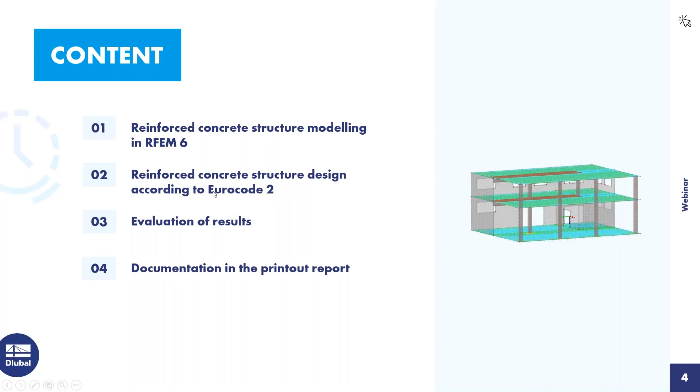This is reinforced concrete structure design according to the Eurocode. I will also design a T-section here under the slab. Then I will evaluate the results and discuss them. I'll show how we can work with the graphical display of the results, and also how we can print the results into the protocol in the printout report, and document our calculation. I will now go directly into the structure in RFEM.

The structure, with its members and slabs, was already defined. I'll only give you a short overview about the objects used - the basics of reinforced concrete design, and also the design of members, the reinforcement, definition of members, and the design using member representatives.

If you have more similar members, this was shown in the first webinar for reinforced concrete structures, which was made or shown in November of last year. There, the basic steps are shown - how you can define the properties and settings. My colleague Caroline will post the link into the chat where you can find this webinar. It's very good for beginners. So therefore, today I will go into the design, especially things that were not shown in the first webinar.

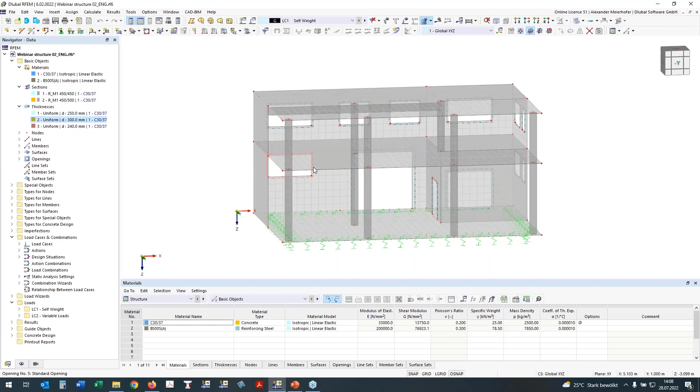The building now has elastic springs, so elastic support, and this will have also influence later in the settings for the deflection design, which I will show you.

At first, I want to deal with such nodes where we have the connection between the columns to the slab, and here we should place mesh refinements to have a better FE mesh.

For this, I go to the data navigator, where by double click I can open a new nodal mesh refinement, and give my settings, which I have for radius 1 meter, and the inner target FE length is 15 centimeters. It comes from the dimension of the cross section of the columns.

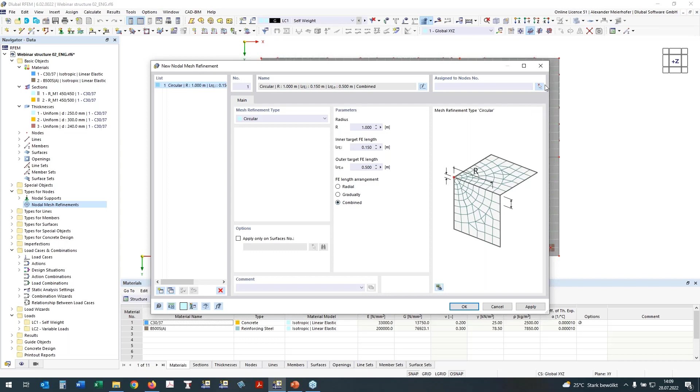For the length arrangement, I use the combined approach, and now I will assign the nodes with two rectangles where I want to have the refinement. If we take it through in the isometric view, we will see I have it catched, and everywhere was now my mesh refinement.

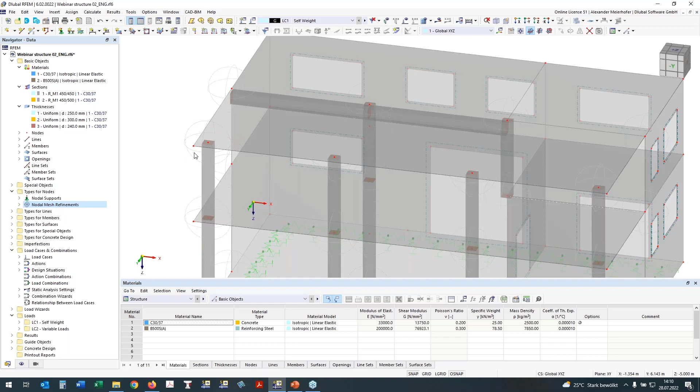On these nodes from the column and the slab, we have also singularities, and how we can deal in the concrete design with these singularities is described in a very good knowledge base article on our website, which I want to advise you. Caroline will also send the link to this technical article in our chat, so you can find it very easily.

And I will continue and select one approach, which is the use of the surface result adjustment. It means I will select or define the area which is exactly the width of the column, and set there the inner forces of the surface to 0.

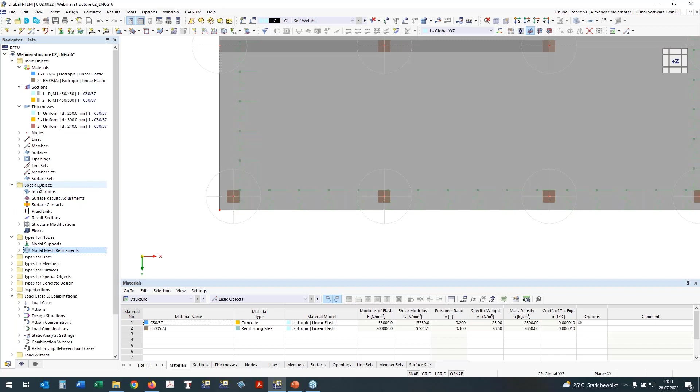Surface result adjustment can be found on the special object. By double click, I can open the dialog, and now we can define a new rectangle result adjustment with the dimension of our columns.

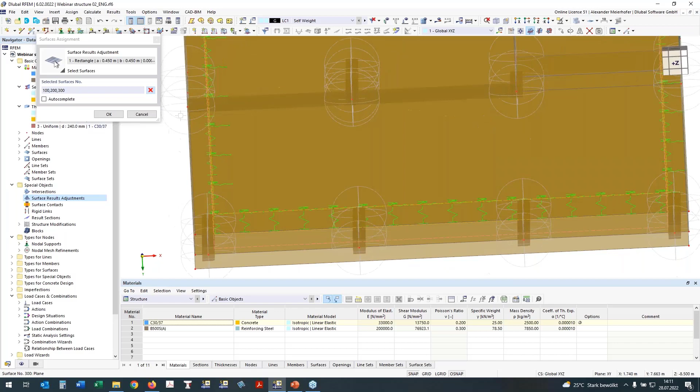I want to have it on all 3 surfaces, and you see the number of my surfaces was so chosen that I know where it is placed. So 100 is the slab on grade, 200 the slab over the ground floor, and 300 is the slab over the first floor. If I press OK, I have already assigned the surfaces, and now I have to define the center of my adjustment.

Here, by copy, I can simply copy this adjustment and set only the new center of the result adjustments, and then I will have it in all areas.

I make one new and want to define it also over the wall. The width is 25 centimeters, and I defined a little bit bigger area, and defined it here because here is a wall. Define it also in this area.

I made one failure. Now I forgot to define the adjustment type. I want to set it to 0, and I want to set all inner forces to 0, and this should be done for all defined adjustments. So I was one step too fast before.

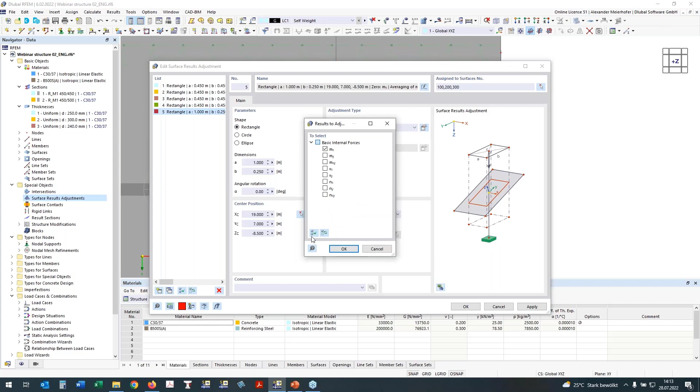This should be done before I copy it, and then it is always in the right setting. By OK, it will be placed. We can see it, and we can also work here by drag and drop. We copy it by drag and drop. If we press the Control key, you can put it by drag and drop, and it's very simple to work with it.

So this is then for the connection of the columns to the slab. One additional setting for the slab is necessary. I want to have here hinges over the length of the supported line.

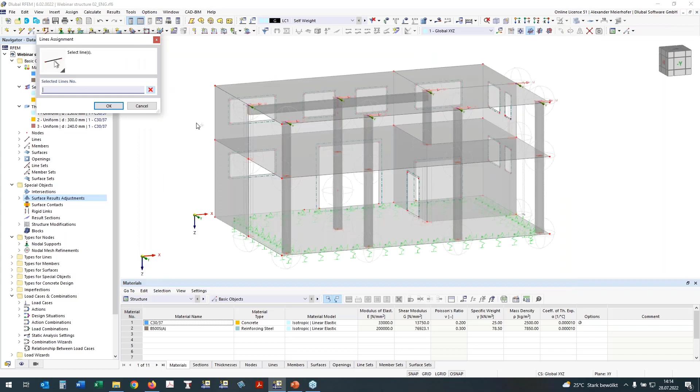The definition is very simple. We make double click on the surfaces, and the edit surface dialog will open. Activate hinges, and in hinges I click to select lines, press Control, and then I have selected 3 lines where I want to have hinges. The hinge type is as default already the moment hinge, and I will put it to all lines, the line hinges number 1.

Okay, done. It's ready now, and if we take a look at our refinement, it is everywhere placed, and also the adjustment. In the display navigator, we can deactivate the mesh refinements because I don't need it anymore for the work now, and the graphic is then more clear for the presentation.

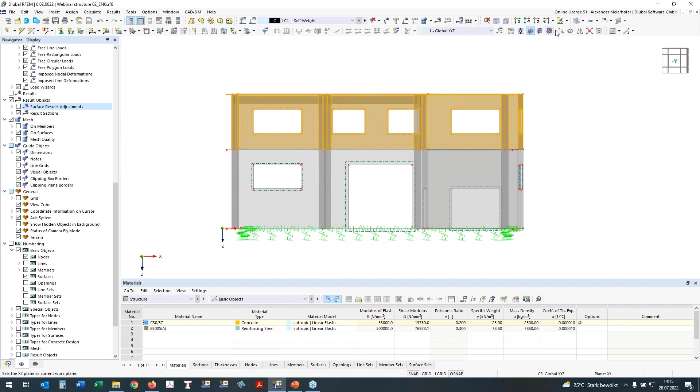As next step, I will define the RIP for the slab over the ground. For this, I will hide the first floor by selection, and now I have the first floor.

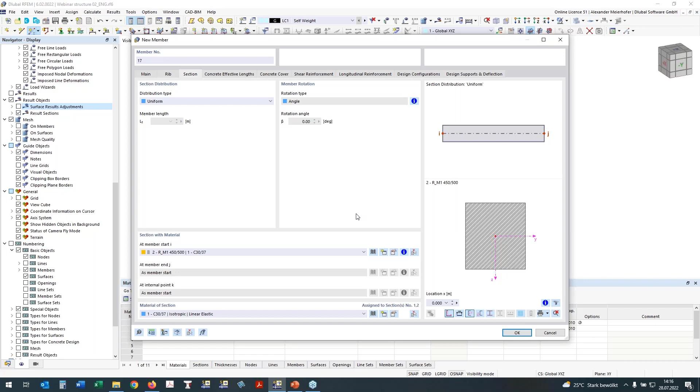By using new member, I can define now section rib by selection of the section number 2, which should be used for the web. The web should be 500 millimeter high. I can define now the rib from here to here, and also from here to here.

Something was wrong, okay, I do it again. I know what was the topic, I will make the selection new and select only the slab which I want to show. So the new member is the same section, section number 2, and then from here to here.

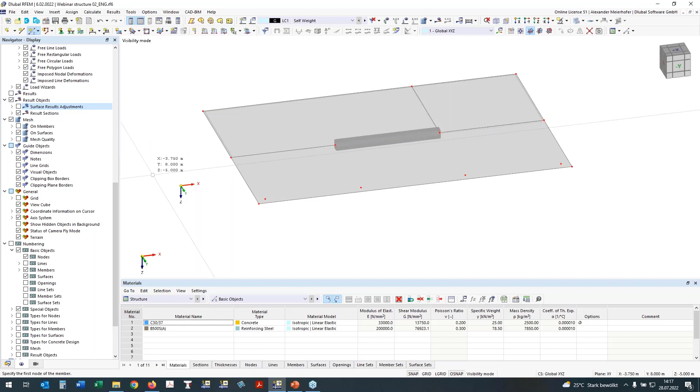By escape, I come to another point. So if we take a look at the complete view, we see here in the first part I took care about the rib. I go now in the rib section, and this is a very new feature that we can now also define more sections or segments during one length of the members. This is completely new developed.

I use here the calculation of the width, integration width according to Eurocode 2, and the splitting of the segments can be done in 50%, 85% and also 100%. Now we have more different integration points. Here we have an inner support, and it means we have to consider also for the calculation of the integration width the length of the neighbored span length. So I have to define here 180, and I have now my different integration width.

We have here also a new option that we can make a linear distribution from the integration width, and now we have defined the rib for the design.

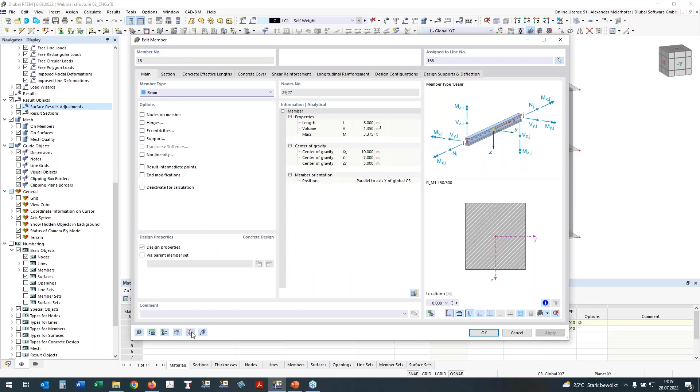For the second member, I use here the copy of object selections. It's a very nice tool. If I click here, we have really copied all inputs, it's a rib, and the only thing I have to change is that the end field is related to the segment, for the user-defined point 80. And then the inputs for the static analysis is ready.

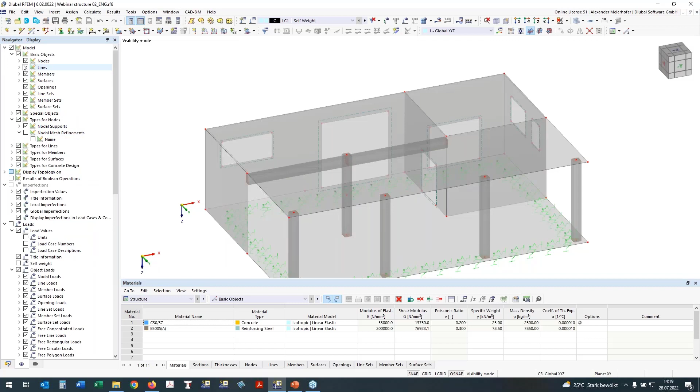And now I do it again what I did before. And a very nice feature from RFEM 6 is now that we can show the rib section also in the graphic, and we see that the integration width is also shown here in our main graphic of RFEM.

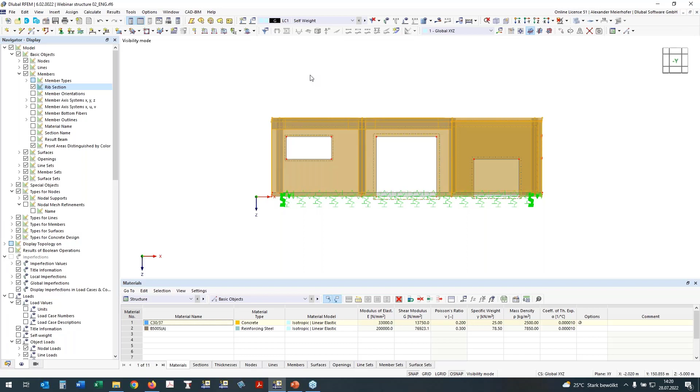Okay, now I will select again my slab here, and will continue with the definition of the design properties.

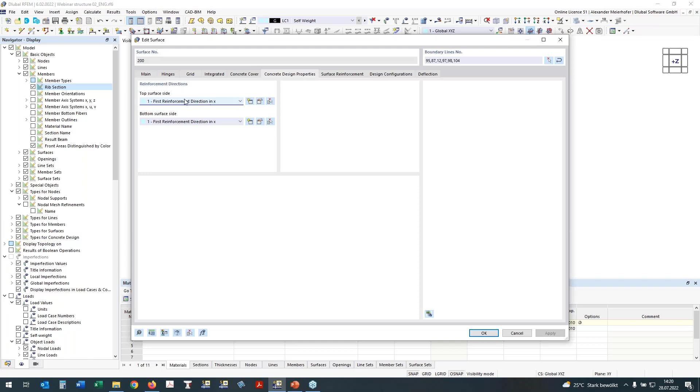The design properties for the reinforced concrete calculation are activated by double click. I come into the surface dialog, and I continue with the concrete cover. The concrete exposure durability is defined by the exposure class, which is default to XC1. This is what I let, it's okay. The design direction of the reinforcement is the first direction goes in X. This is also default, which I will not change.

And here is one important topic. In the surface, I need a surface reinforcement for the diameters so that I will know the statical depth for the calculation. I just design a type of basic reinforcement, which will be in both directions, diameter 10 with a distance also 10 centimeters, and by pressing OK it will be then assigned to the surface.

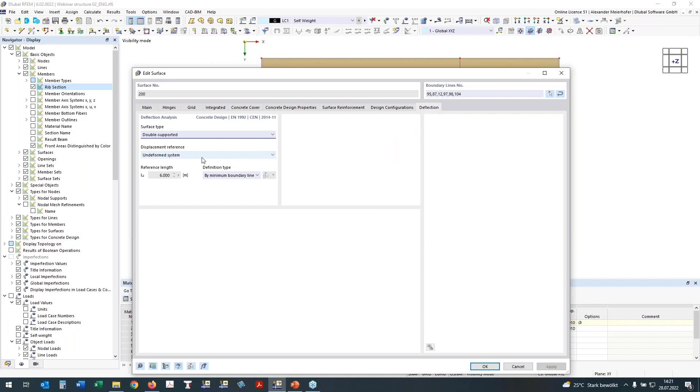Here are listed design configuration, which I don't discuss today, this was in the first webinar very detailed. I will later take a look at the serviceability configuration, but here's one very important thing which I mentioned before at the beginning.

We have an elastic supported structure, therefore it is an advantage to relate the deflection also to a deformed slab or plane. Here I use the parallel moved slab as a reference plane for the deformation, and as reference length I will define it manually by 2 points and say my reference length for the maximum allowed deflection is from here to here. It's about 5.5 meters. By OK, I have defined all properties for the reinforcement design.

We can also take a look into the graphic. If we go to the types of concrete, we see here we have surface reinforcement longitudinal, and if we activate it, we see that the reinforcement is defined in this area.

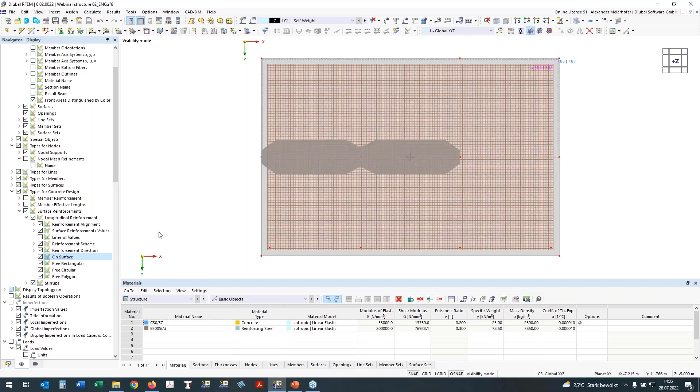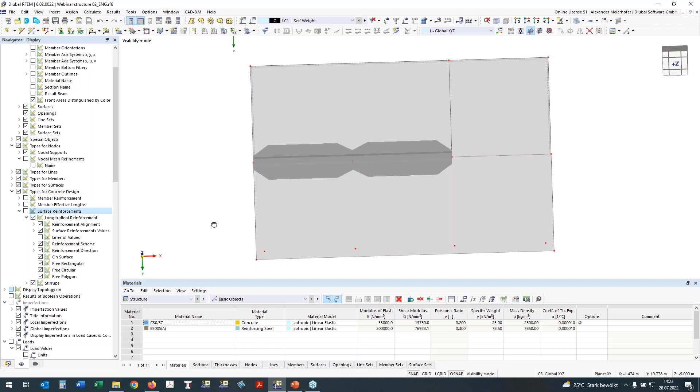I will go now to the definition of the ribs. Here we need also reinforcement. I want to design not two members; I want to design it with a set of members. So therefore, I select both by pressing the Control key, and create a new set of members.

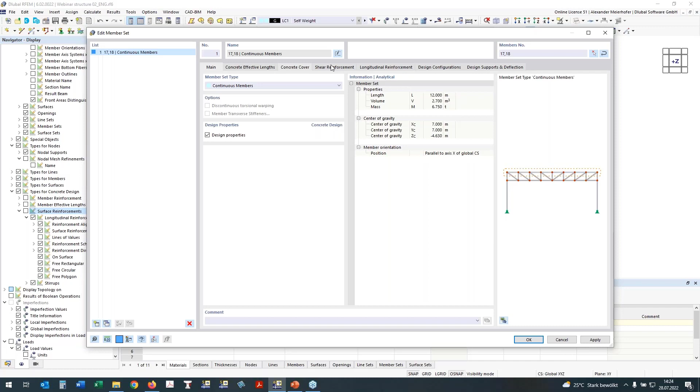And here we have now the new set of members, and I can say now design properties for this set of members, and we see that all inputs for the design properties are now open. It means the concrete cover is now shown, and here we have also the same durability which we have already used for the slab, XC1, and the shear reinforcement.

I will change the distance to 50 centimeters, and if we take a look in another view, then we see here the variable cross section of the rib is already shown, and also the reinforcement. I will go to the longitudinal reinforcement. We see here the reinforcement which we have defined in the slab is already placed. If we go closer, we will see it.

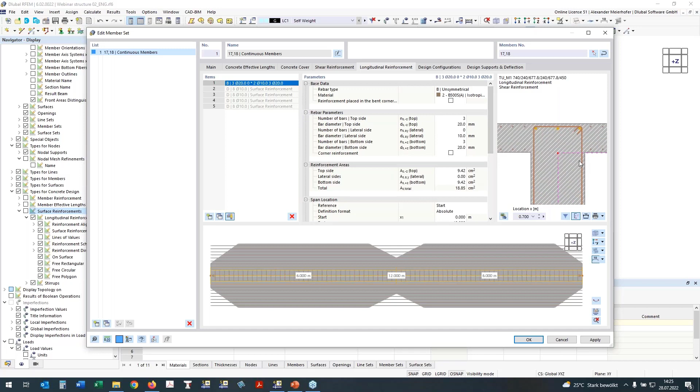It is activated by this icon. If somebody doesn't want it, you can deactivate it or leave it. I want it, so therefore I will leave it here. But I will define now a different distribution of the longitudinal reinforcement. I want to have it unsymmetrical here in the web.

So therefore on the top side I will define here these three rebars with diameter 20, and a lateral reinforcement of 2 diameter 10. And on the bottom side, I want to have 3 diameter 20. And it will be directly updated here in the graphic.

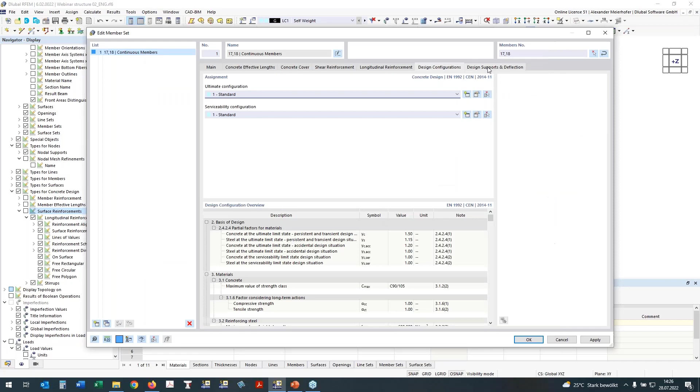Here is also the 3D graphic of the reinforcement, which can be used for control of the inputs. Here we see a small reinforcement drawing, also the used shear reinforcement, which can be activated or deactivated. It's nice for control and for printing. Okay, I can close it. Design configuration is the same as for surfaces in all parts.

And now there is one important tab. We have to define now the deflection properties or conditions. I want to check only the deflection in Z direction for the gravity loads, of course. And here is the point: my reference is the deformed segment ends. This is now also the point which I mentioned.

We have an elastically supported structure. So it means the supported ends will be a little bit displaced in Z, and this I don't want to have in the design check for the deflection. Important is that I generate on the ends or in the middle some design supports. We have here design supports in Z direction, and our wall is 250 millimeters. It's a monolithic connection, and will be used for the walls at the end and the start.

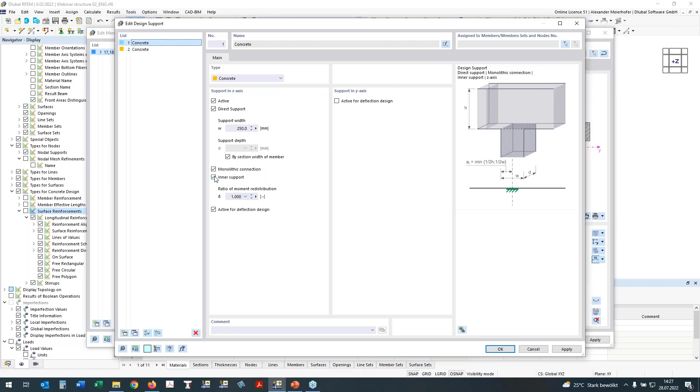I directly copy it and use here also the width for the columns, which are inner supports, and here I have to deactivate inner supports and press OK, and then it will be placed directly at the beginning. I will change the view here to see it. Here we have the first one, and at the end it will also be placed,

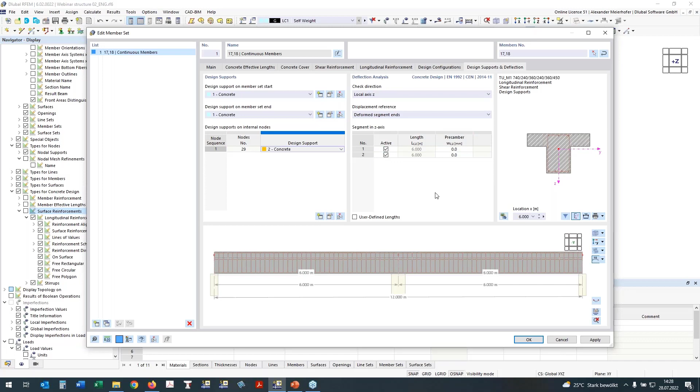with the 250 millimeters width, and in the center I will also use the design support, but it is now for the column and it's bigger, 450 millimeters. And we see here now for deflection we have some lengths, 6 meters and 6 meters, and if we had some pre-camber we could define it here, but in this case I don't have it.

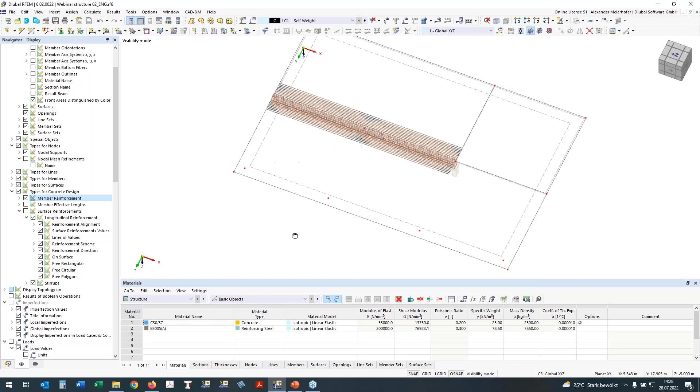But okay, we can now confirm the inputs, and also we can check the member reinforcement and display it, and see that everything is okay. Before I start with the calculation, I will make new object selections. I have to make it a little bit bigger. Create new object selection, and the advantage of this object selection you will see immediately after closing the dialog.

This is my slab over ground floor, and I press OK. And now we have here in the guide objects the object selections, and you see I have already done a little bit more, but the new one is object selection number 200.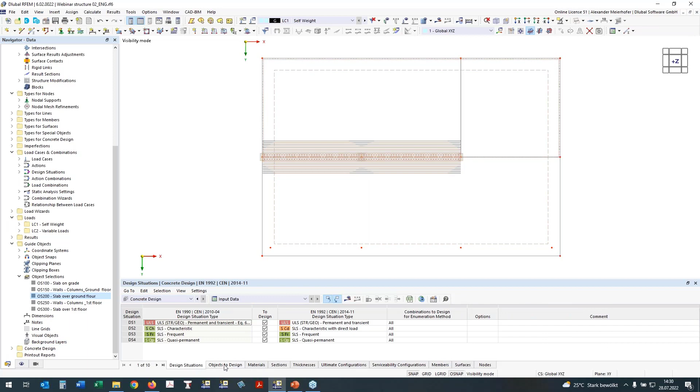And if I go now to the concrete add-on, I can use the object selections directly to define all objects which are there in the add-on. It is then replaced, and it will only show that object, and it is very good to organize the work.

Before I start the concrete design, one hint about what you have to check in the basic settings. You have to activate the concrete add-on in the design add-ons, and in the standards you have to define the used standard for reinforced concrete design. Here I will use the Eurocode 2 with the original rules, so without national annexes.

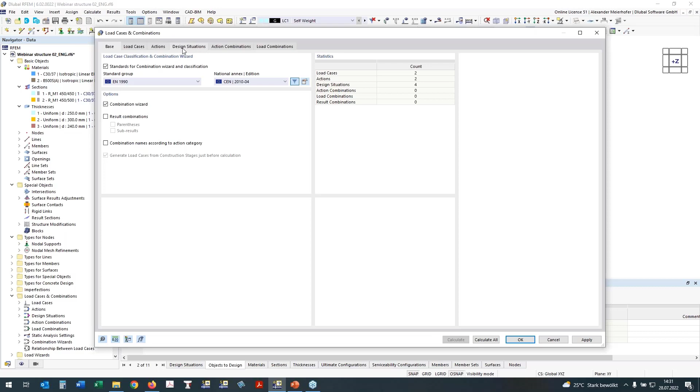And if we have the loads, this is also one additional hint. I have defined a load case, self-weight and variable loads. We have to define the action category there. It's for the office. And in the base data, I have the standard group and the combination wizard defined. In the design situation the serviceability and the ultimate limit state design situations will be listed automatically. And here will be the list of all activated design add-ons.

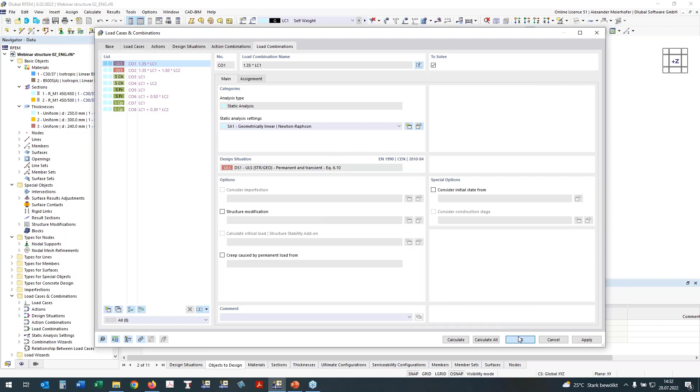Here we work only for the concrete design, so I activated it for the concrete design, and all load cases related to this design situation will be calculated. I can multi-select it, and I have to select my combination wizard. The combination wizard is defined so that we generate load combinations, and the static analysis should be done by first order and geometrically linear. If we go to the load combination register, these combinations were generated automatically and will also be used in the design of the reinforcement.

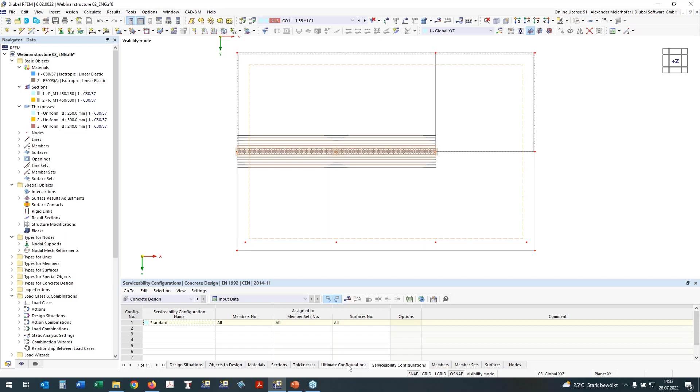Now I go back to the concrete add-on. We have here already designed the object selections. Material and sections are only listed for control. Here are the settings for the ultimate limit state. Here we have the serviceability state. In the serviceability configuration we have the stress check, and the crack analysis should be done by finding automatically the limit value for the crack width, according to the defined exposure class. We have XC1, so I expect 0.4 in the calculation. For the deflection, we have L, the reference length, divided by 250. And here is the crack state detection for the serviceability.

This I want to explain a little bit more, because this is really new, released two weeks ago. The first one is the crack state calculation for each associated load, so each load case or load combination is considered and calculated for itself. Crack state determination as envelope of all SLS design situations means the program checks all load cases defined for serviceability and uses the correct state, the most safe setting. Calculate the deflection only in cracked state independent of the load means all elements are considered as cracked. I'll take the first setting and confirm it.

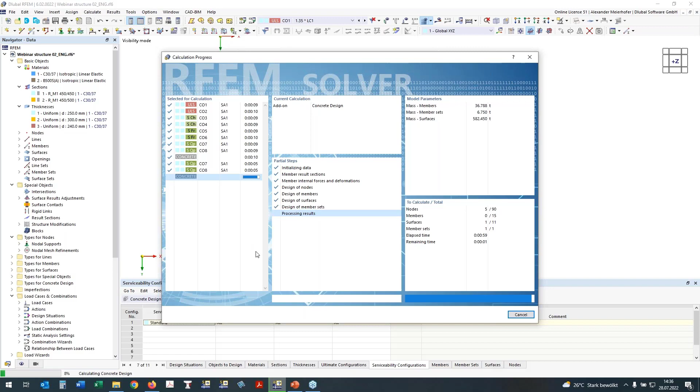Okay, so now we have an overview of what is fulfilled and what not. We have very detailed tables. The work with the tables was shown in the first webinar. Today I want to work more with the graphics and use only the settings for the member. We see the design ratios of the member here. Everything is clear. I have 2% for the detailing of the spacing, and all design rules are okay. The design ratios are also sorted by members, surfaces, and nodes. Design ratio for nodes is also new; this is the design ratio for the punching proofs, and we see here it's not fulfilled.

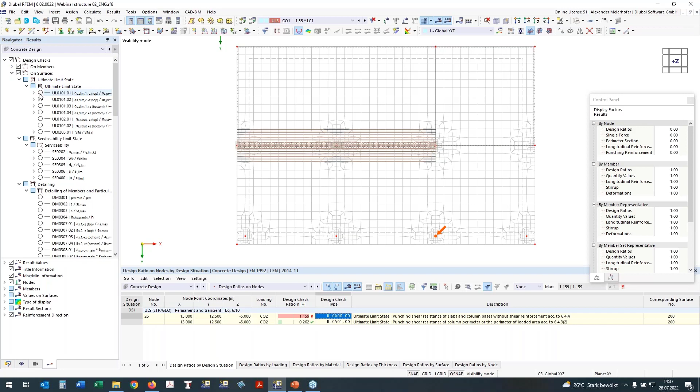I will go now to the graphical results, and firstly we take a look at the results of the surface, and we have here the result values. I want to activate it as only extreme values, and here we have the panel. So here's a ratio of the defined reinforcement, the ratio between the provided and the needed reinforcement. And here we see in the red areas too little reinforcement defined.

On the top side, here is also a punching problem. I would expect, of course, more reinforcement here for the punching design. If we take a look at the bottom reinforcement in the first direction, we have everything in the green area. The maximum ratio is also on this small part, but the main area is under 1. And the bottom reinforcement in direction 2 is also okay. We have here a ratio of 93%.

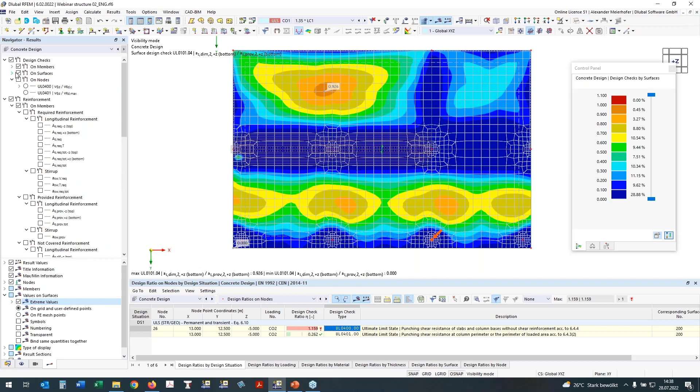And here we see for the required punching reinforcement, we need 0, but we need then longitudinal reinforcement. In the configuration, I said, please calculate the required longitudinal reinforcement to avoid shear reinforcement. And we see if we would place here these 12 or 13 centimeters, everything would be fine.

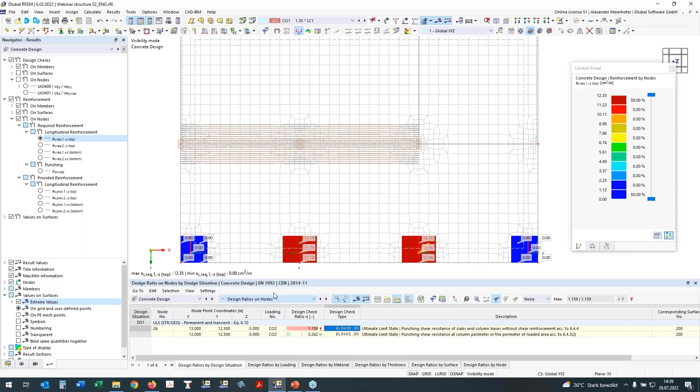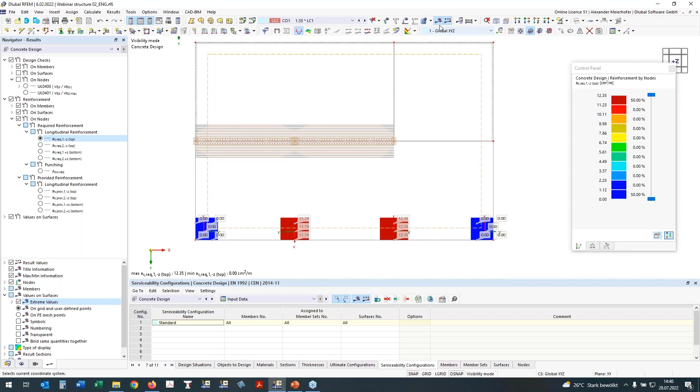I will now define the missing reinforcement. For this, I will go to the global settings of my add-on. I will deactivate the deletion of my add-on results if I change the reinforcement. And now I can work in the inputs. I deactivate also the mesh so that I have a nice view, and go now in the navigator to my types for concrete. And for types for concrete, we have the surface reinforcement.

With new surface reinforcement, I generate a new one, which is a free rectangle area. I assign it to my surface number 2, and the missing area here for punching is about 7.8, and I want to have it only in the top direction. And here is the area which I want to define. I activate my grid to have good coordinates. So I have a grid of 25 centimeters, and this area is already defined.

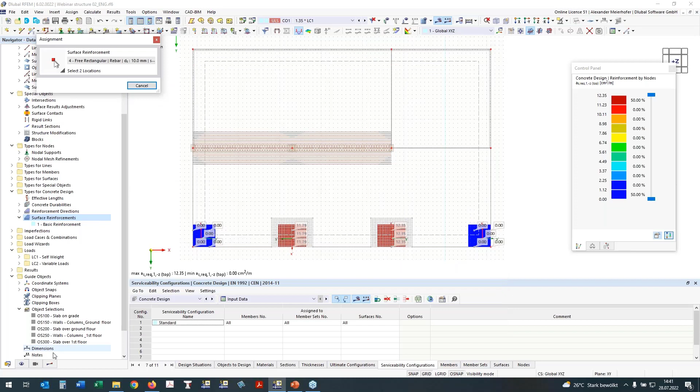I copy it like it was for the result adjustments of the surfaces, and I can use really the same concept. Now I want to do the input also on the other missing parts. For this, I copy the existing one and go in the result navigator, so we can activate our graphic for surfaces and say the surfaces have a not covered reinforcement on the top side in this direction.

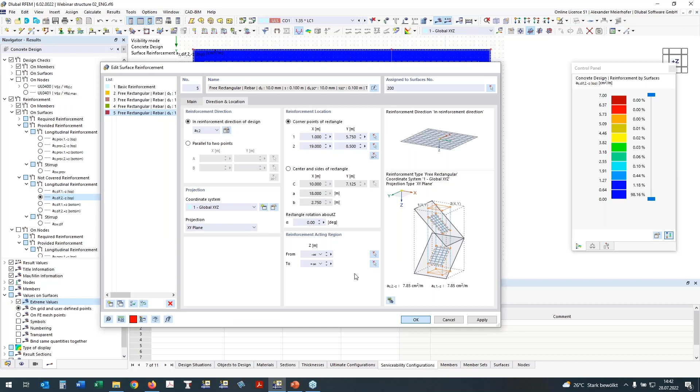And if we take a look here, I will define the same area over my supported line in the first direction, and in the second direction the same area, and take a look what is here. Here I need also some reinforcement, and take it over this length. It was a little too small, so you can also redo it, and by pressing OK, it is then confirmed, and it is in the structure.

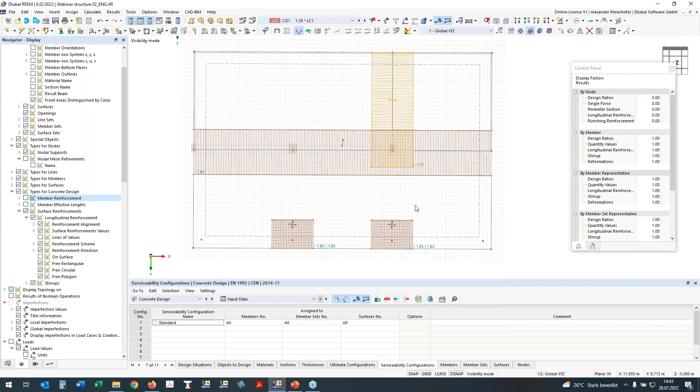For the surface, I can then take a look where my surface reinforcement is. I go to the surface reinforcement and activate it on the surface, and we see what part of reinforcement is defined, and I can also check if the direction is right. Here I have defined one thing too much; I want to have only one direction, and it's the same here. By OK, we see I have only one direction. That's how easy the definition of this additional reinforcement is.

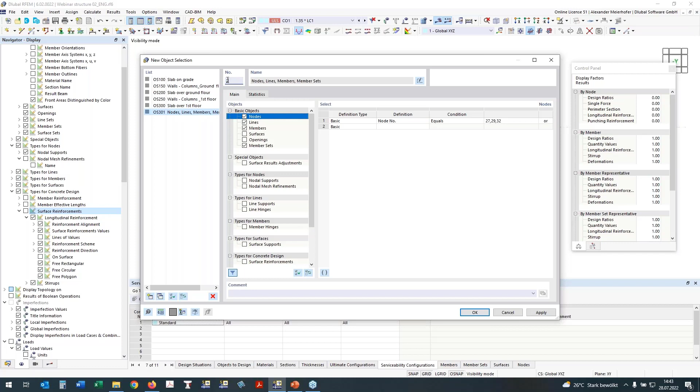Now I want to take care of the reinforcement in the rib. For this, I select it and change the view, and generate also a new object selection, whose name should be the T section. Press OK.

And here I work now with the design checks on members, and take a look at my cross-section resistance. We see I'm under 1, so everything is fine. If I take a look at the shear reinforcement, the shear proof is also fulfilled, so I need no additional inputs. The serviceability is done in such a way that the stress of the steel is checked.

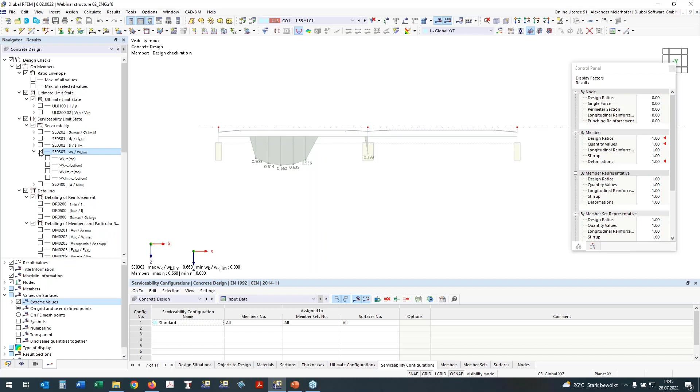We can take a look at the crack width, and the crack width is also fulfilled. And now we want to show you the newest release. We have here the additional details in the result navigator. This is available since Monday in the new version, which you can download from the extranet of RFEM 6, and you can activate here also the direct value of the crack width.

For example, we have here only 0.26, and it is also for the deflection. The ratio is very small, and the existing deflection is now 0.6, and we see here it is related. Here is the end, it goes to 0, and this comes from the relation to the deformed structure.

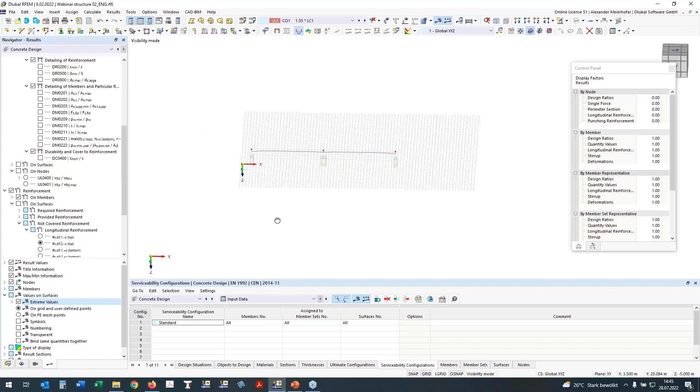Okay, if we take a look at the required reinforcement, it is also here in the table. Required reinforcement of members, As top, As bottom, and we can take a look at it. You have here the graphic, and if we want to print it to the protocol, we have to generate a new protocol, but what we have to consider is that the calculation must, of course, be done again.

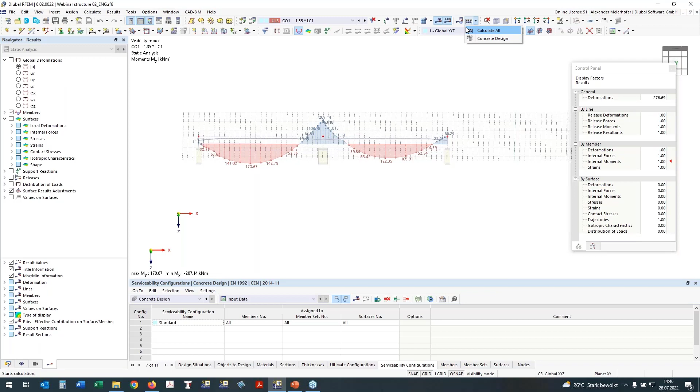We changed the reinforcement. For this, I go to the global settings, activate the deletion of the add-on results, and then it will be updated and deleted. And now I have to start the calculation of the concrete design add-on anew. You can do it also here with this icon and start only the calculation of the add-on. The static analysis results were not deleted because the reinforcement has no influence on them. Now it is only the calculation of the concrete add-on which will be refreshed and done again.

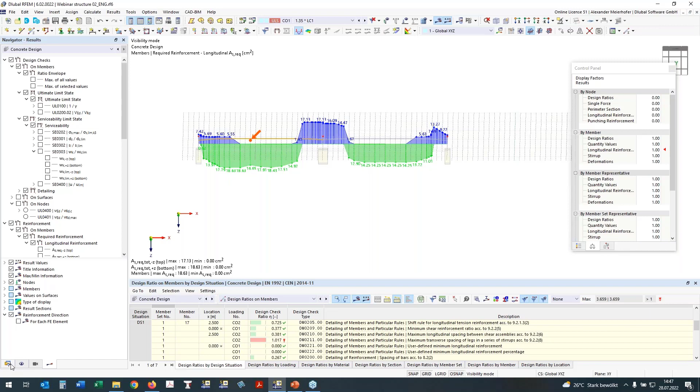And as I said before, this is a two-step calculation. And in the last step, we have here also again a concrete calculation for preparation of the results and the graphic. So now we have the updated results. Design ratio by nodes, by members is okay. And then I will go to the printout report in the navigator and show you how simple it is to work with the printout report.

If we generate a new printout report, I make it here for the concrete design and assume that all other documentation of the static analysis will be done separately in another printout report. Today I want to show only the report of the concrete results. So types for members and types for surfaces we don't need, but types for concrete design is necessary for the durabilities and the surface reinforcement.

And what I also need is the concrete design, where we have to discuss what is necessary. We see here it is possible to show every tab which is also available in the add-on. It can be printed, but I want to have here only the design ratio by set of members, for nodes and for surfaces. The reinforcement for members should also be shown only by member set, because I design only the member set. The provided reinforcement by member set, yes; the not covered reinforcement I will not show. For the reinforcement by nodes, I leave it as it is, and the design overview will be deactivated.

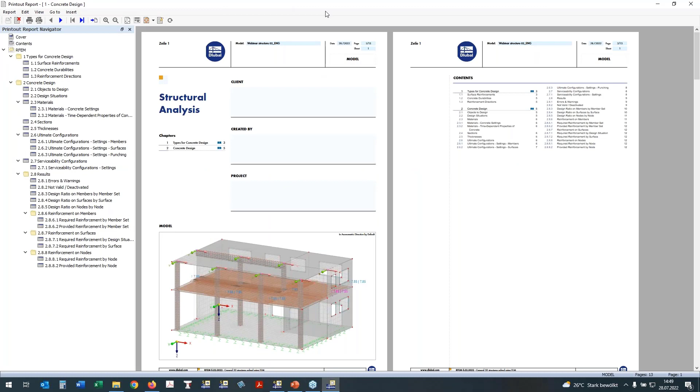By Save and Show, it will be generated. The printout report is one of our new developments in RFEM 6. It is completely new. It is a separate instance, which can be opened parallel to the RFEM calculation. And if we take a look at our results now, result members, we go through the results of sets of members.

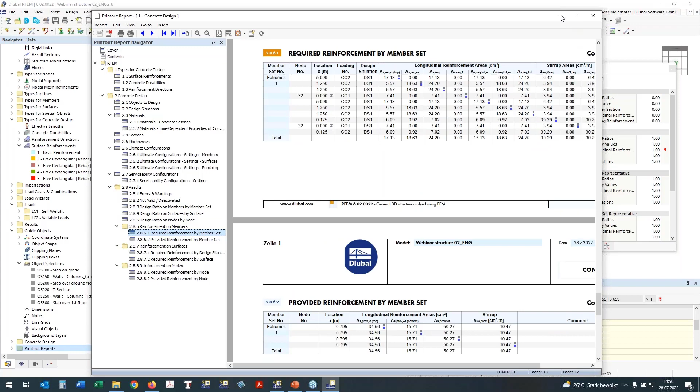Here is one thing, the crack control, which is overloaded. This we can check later. Detailing is 1.017. It's okay. So from my side, it's okay. For the design ratio of the nodes, the punching design also has all ratios fulfilled. And if we go to the required reinforcement by member sets, we see the list of the required reinforcement. Here I want to show also how we can print the required reinforcement, because in my eyes a picture or diagram is better than many tables.

Here we can use the printout report, the graphic, and I want to use the current one. New is also the possibility to define an area in RFEM to print it to the graphic.

By 2 points, I will activate the grid so we can move it and make it a little bit bigger.

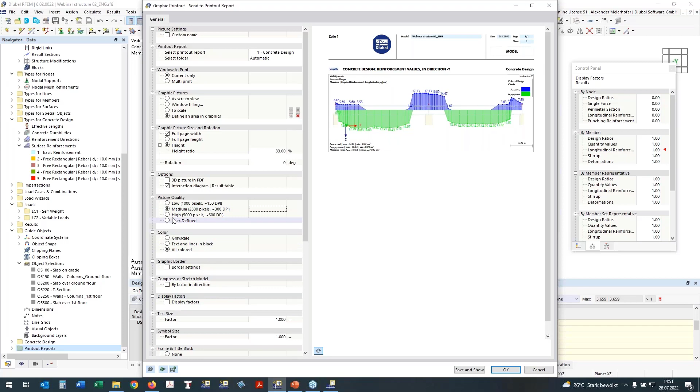Okay, and this area will be saved and used for later. I make it a little bit bigger, and the panel should be outside of the graphic. By OK, it will be printed to the protocol. If you activate it, you can see it here and make it smaller.

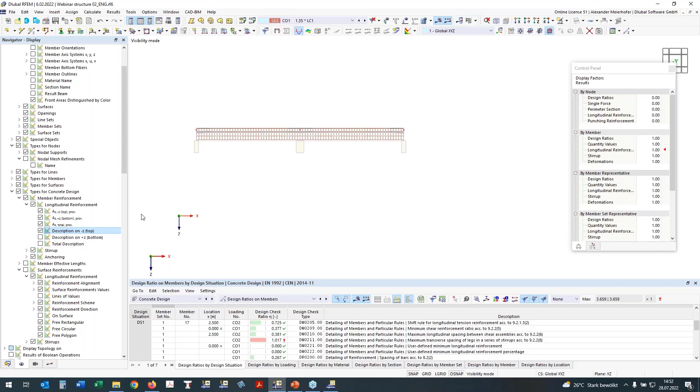Everything is here, and by using the inputs of the reinforcement, we can deactivate the design checks on the required reinforcement and activate our member reinforcement longitudinally, using the descriptions. With this description, we can print it directly into the protocol by the same functions. The same icon will be pressed, so the area is the same. I don't change anything, and with OK, it will be printed.

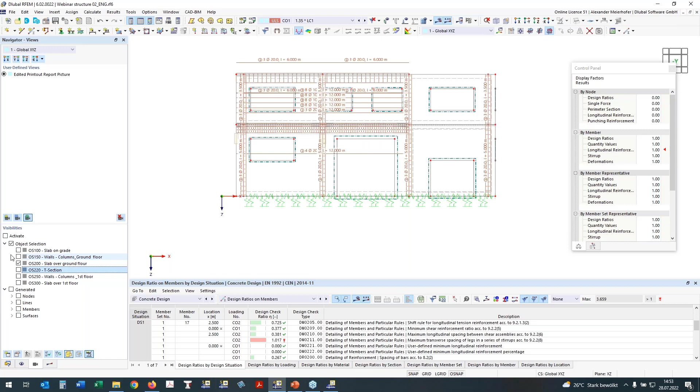Now I will take care of the slab. For this, I will go to my view navigator, display view navigator, and this is the next advantage of the object selections. If you remember, I have here the slab over the ground floor, and if we take a look at the Z direction, now everything activated is what I selected before, and I can continue with my presentation of the results for the slab.

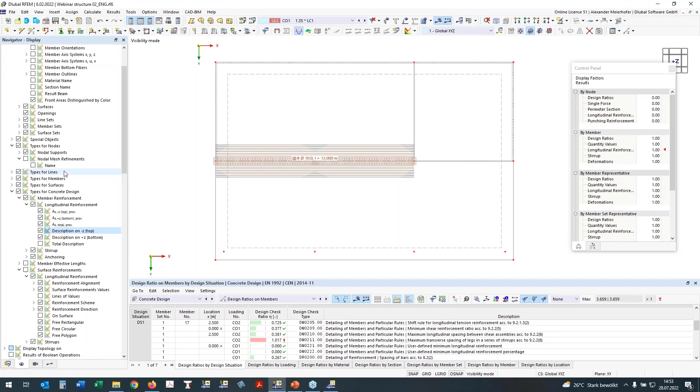Firstly, I deactivate my member reinforcement, and in the result navigator for the design checks of the surfaces, I go to the ratio of my longitudinal reinforcement on the top side. It is okay, the bottom was also okay.

We take a look at the displacement, so this is a ratio like it is for members, and here is also the deflection. Important for me now is the punching proof, because this was not fulfilled before. We see it is now under smaller one, the ratio. It's perfect, and we can print now also a documentation of our results.

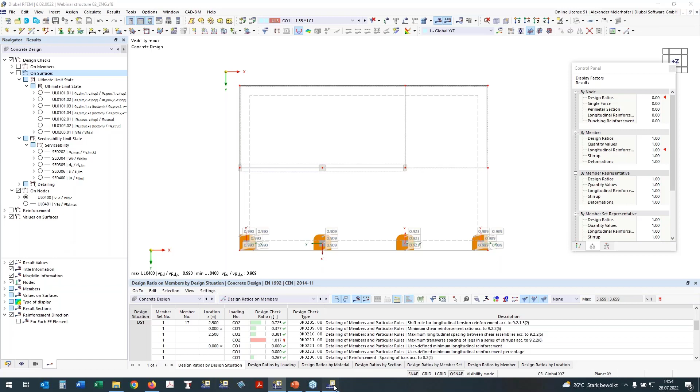I want to use now a bigger paper like it was done in the documentation. The first printout report, this is format A4. I want to use a bigger one for the plots. I'll make a new one, a new printout report, and say this is only my annex for plots. For this, I deactivate all settings here and generate a new page format.

For this, I have to select a printer which is able to print bigger pages. So here is my printer, which can print A3, but you need 7 millimeters distance on the bottom side, and I don't need some cover page. With OK, it is saved, and save and show.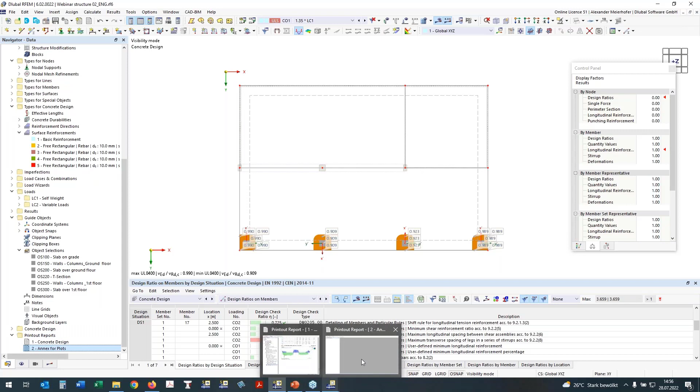I will get a new protocol, which is also shown here, but it's empty until now, because I printed no reinforcement or result there. I want to use the same one again and print here the surface. You see the last view is saved.

I want to have a new one. I want to use it in Z, define it in the new area, so from here to here, with OK. And with the multi-print, like I did before, I can go to print all result diagrams which are necessary.

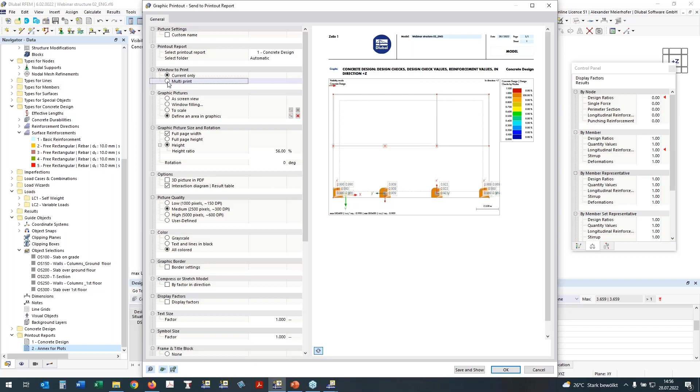Model, it's not necessary, load cases here not, and in the add-on. Now you see this navigator is really the same navigator as here in the result navigator in the main program, and we can print all results which we want.

This is a very nice graphic. On each node we see the value which was assigned in the calculation.

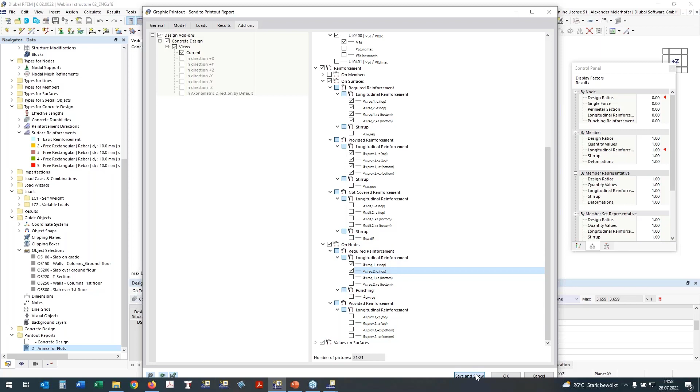Required reinforcement, of course, I want to have it shown—my required reinforcement and also my provided reinforcement. For surfaces and for nodes, I need the required reinforcement on the top side, which must be placed for avoiding the punching reinforcement and to fulfill the punching proof without shear reinforcement now.

It is now started to generate. I have selected, of course, many graphics. It is started now to generate it here in RFEM, and then we will see it step by step here in our printout report.

Oh, this was my failure in the presentation. I selected the wrong one, so let us take a look here. The principle was the same. Let us discuss the result.

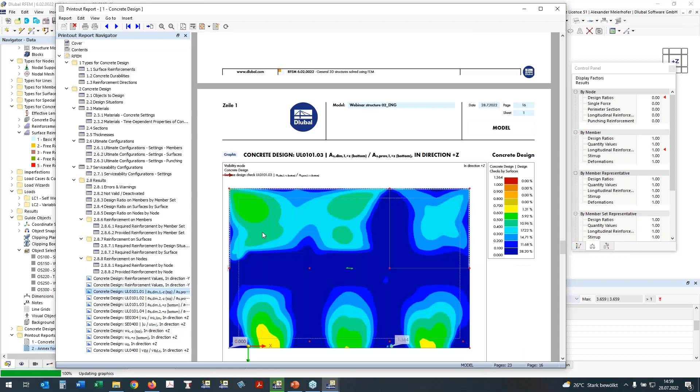It's now in the printout report number 1. Here we see the reinforcement. Everything is fulfilled, also the ratio of the top reinforcement and the bottom reinforcement—it's okay. Here we have the crack width and the ratio of the deflection, and here also the crack width on the top side and the crack width on the bottom side.

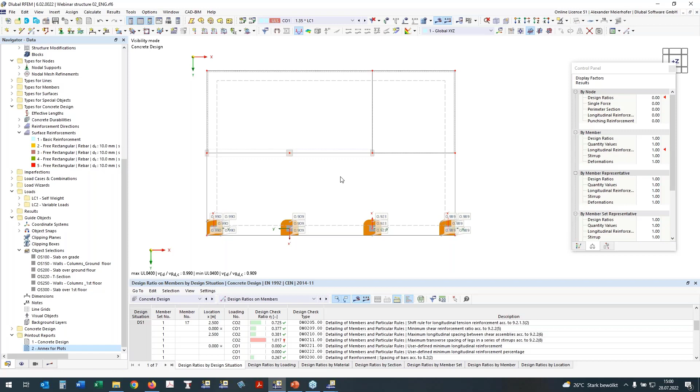Okay, this is the design of this slab, and we are ready with the design of the member of the T section, and also for the punching nodes. I want to show you also the punching design of the foundation slab, where it is a special case. Here we need an iteration of the critical perimeter, where it is critical. It's not 2D, it's iterative.

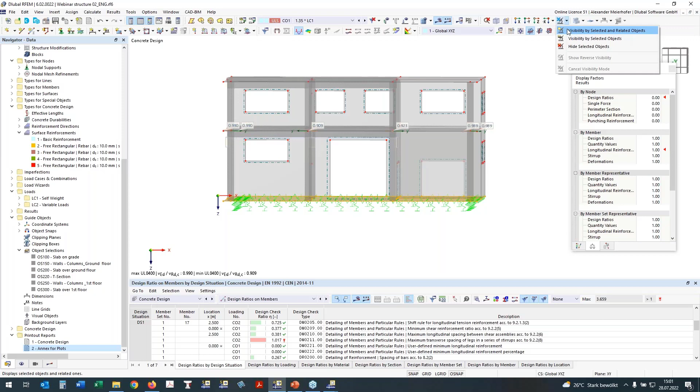We also consider the soil stress under the ground slab, and this will be done now automatically. I do it the same way as before: select only our slab, take a view in the Z direction, same as in the presentation. I go to the node and say it's my punching design. Of course, I have new properties. Now I will delete the results.

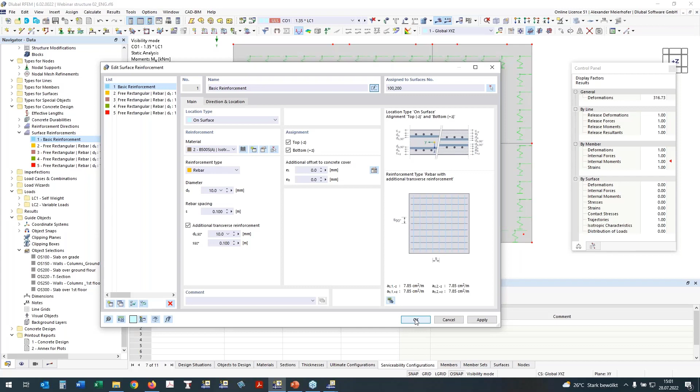Further, I have to define the reinforcement in the slab so that the punching proof can be done. This is very simple in the basic reinforcement. I use here the number 100, which I mentioned before. This will be my slab over the ground.

Then we can start the calculation of these points, if we remember. We have here different types of the punching design: a wall at the border edge of a slab, a corner column, a column at the edge, a wall corner in the center of a slab, and an inner column in the center of a slab. This will be done automatically in the design.

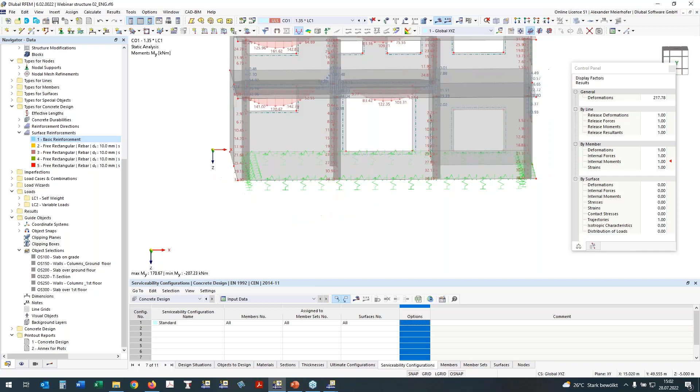I will go to my concrete design. This is now only for presentation, to show how the iteration works. I will select the same way as before. Say please design this node for the punching design. Member sets I don't want, and press OK. Now I will calculate the punching proof for this node on the foundation slab.

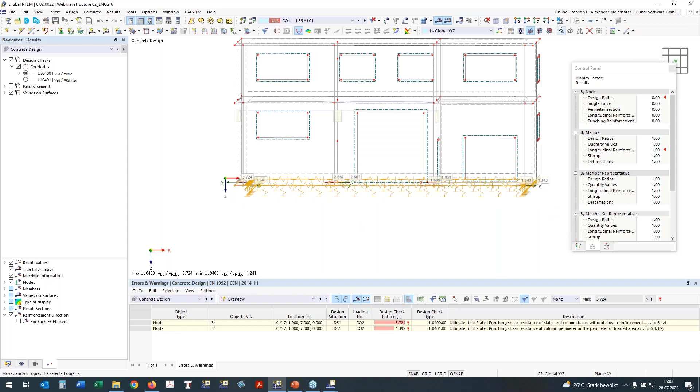Let's go to the other view, Z direction, it's better. We see that the wall end is found, the property or geometry is found automatically. It's a wall end, here we have the columns, and here we have a corner. We also see the result of the iteration finding the critical section. Here it's a very small distance, and here we go until 2D.

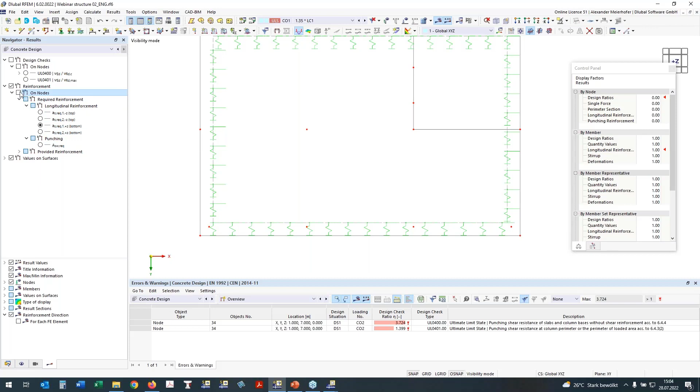This means the reinforcement is not enough, like I discussed before. If we take a look at the required reinforcement of the punching node, we will see if we need punching reinforcement, or if it could be done with some additional reinforcement. We need no punching reinforcement; we can use additional longitudinal reinforcement instead. So the punching design for a foundation slab is now implemented and can be very simply used in your daily work in the design of concrete structures.

Okay, this is an additional topic or feature which I wanted to show at the end of my presentation. I will finish and close my presentation with the picture of the punching design of the soil slab. Thank you for your attention.

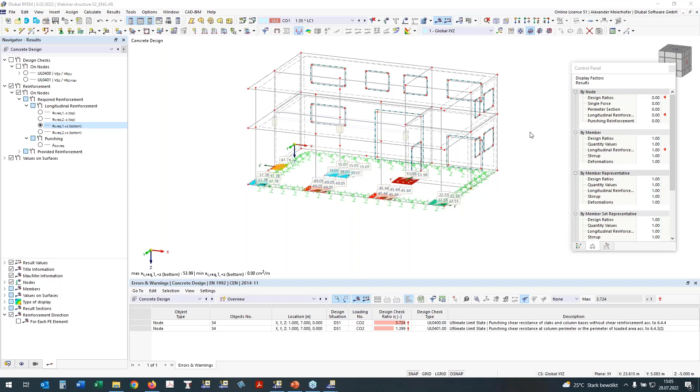Thank you, Alexander, for your presentation. Then I switch over to my screen again.